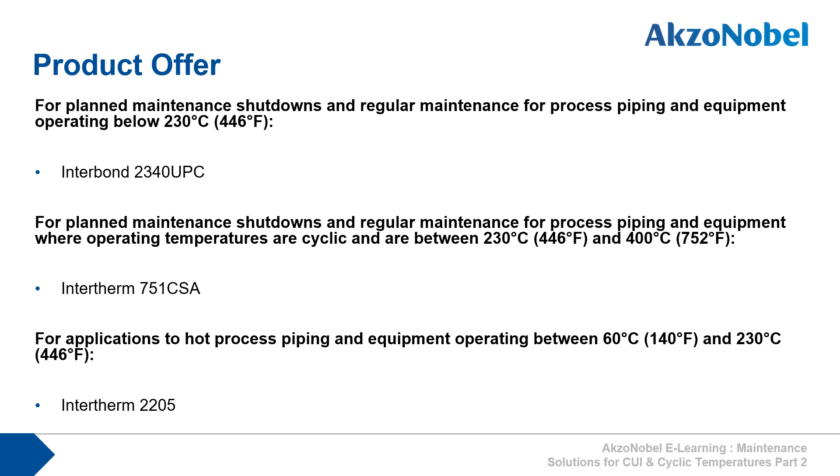Let's recap AkzoNobel's product offer for the CUI and cyclic temperature maintenance market. For planned maintenance shutdowns and regular maintenance for process piping and equipment operating below 230 Celsius, Interbond 2340 UPC should be used. For planned maintenance shutdowns and regular maintenance for process piping and equipment where operating temperatures are cyclic and are between 230 Celsius and 400 Celsius, Intertherm 751 CSA should be used. And for applications to hot process piping and equipment operating between 60 degrees Celsius and 230 degrees Celsius, Intertherm 2205 is the product of choice.

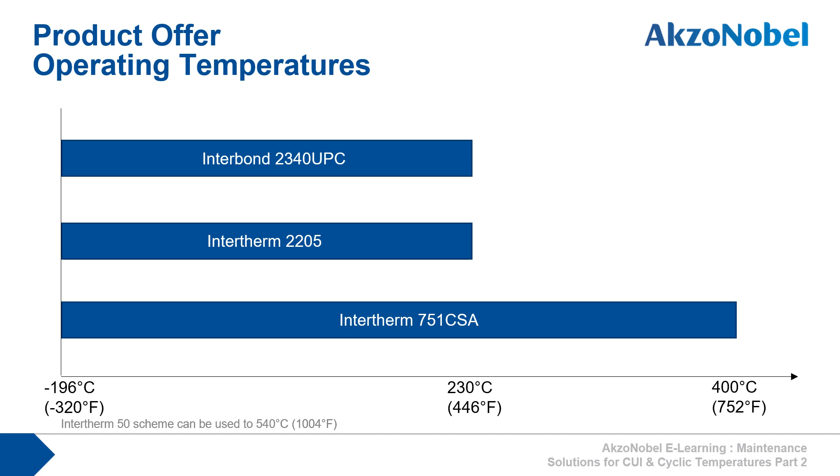This chart shows the operating temperature ranges for the three products. All three products can be used at cryogenic temperatures as well as temperature ranges from ambient to high temperature conditions. But when it comes to direct-to-hand prepared hot steel applications, Intertherm 2205 is by far the best choice, with hot steel applications from 60 to 205 degrees Celsius.

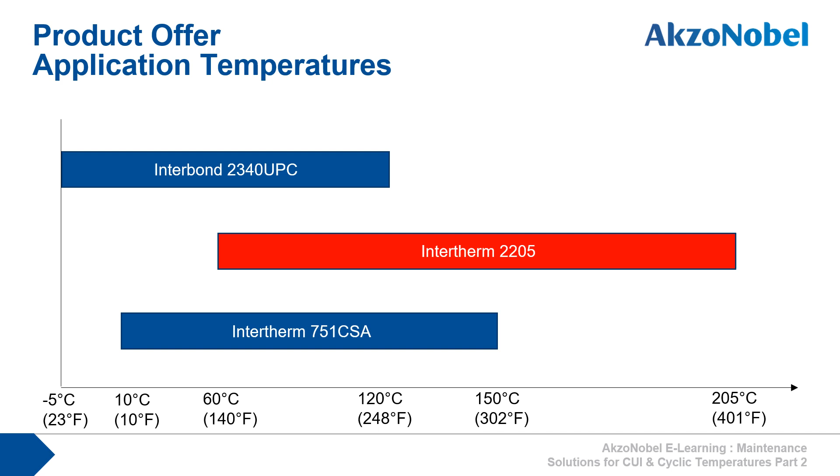The rest of this presentation will now focus on Interbond 2340 UPC and Intertherm 751 CSA. Let's start with Interbond 2340 UPC.

Interbond 2340 UPC, where UPC stands for Universal Pipe Coating, is an alkylated amine epoxy technology, which is a next-generation epoxy phenolic, delivering low temperature cure and higher DFT tolerance compared to traditional epoxy phenolics.

Interbond 2340 UPC is a user-friendly maintenance coating specifically designed for combating CUI that helps generate time and cost savings through fast, low-temperature drying and improved application tolerances.

2340 UPC has fast, low-temperature cure and is dry to overcoat in 14 hours at -5 degrees Celsius. It meets the ISO 12944 Part 9 performance criteria for an ambient cured coating. It has excellent tolerance to over-application, can be applied to hot steel up to 120 degrees Celsius, has high temperature resistance to 230 degrees Celsius, can be used at cryogenic temperatures down to -196 degrees Celsius, and can protect stainless steel against chloride-induced stress corrosion cracking.

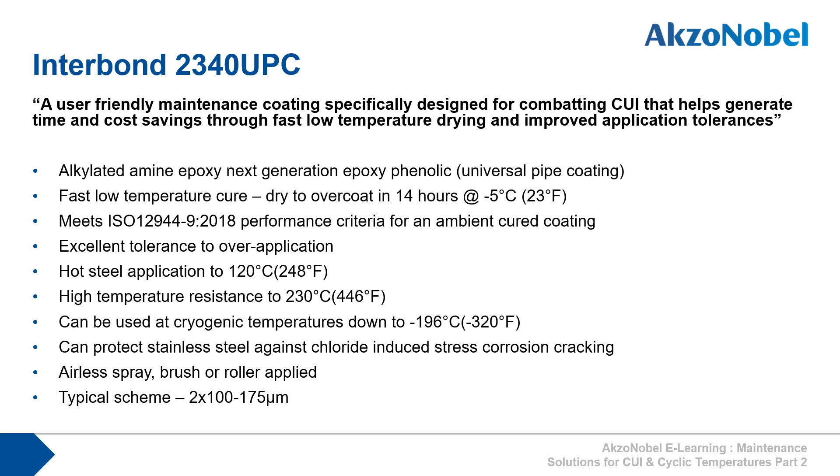Okay, let's look at 2340 UPC's features in more detail, starting with its fast curing property.

Typically, traditional epoxy phenolics will not cure below 10 degrees Celsius. Issues such as maintenance project delays can then happen when temperatures drop overnight or when maintenance needs to be carried out in the winter months.

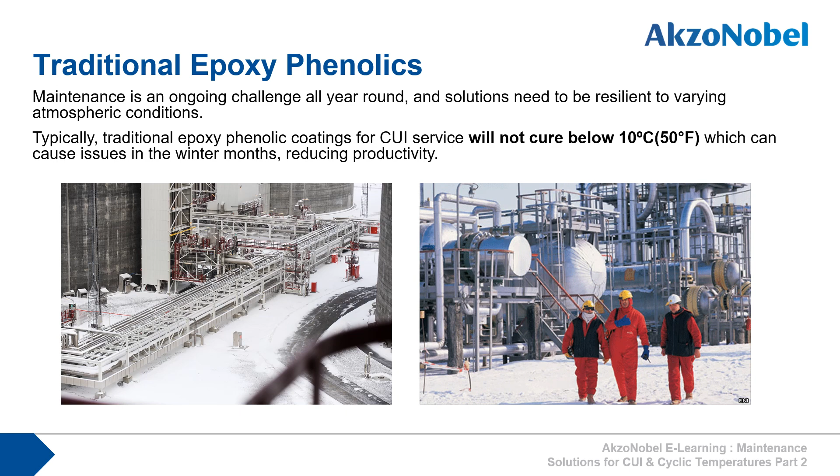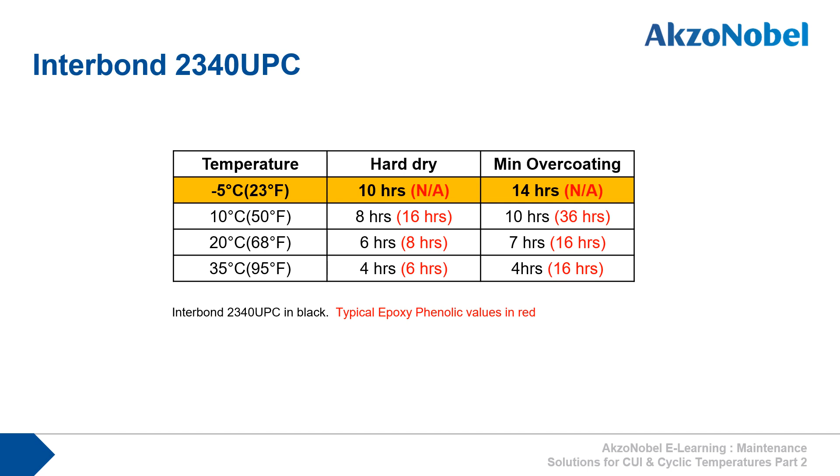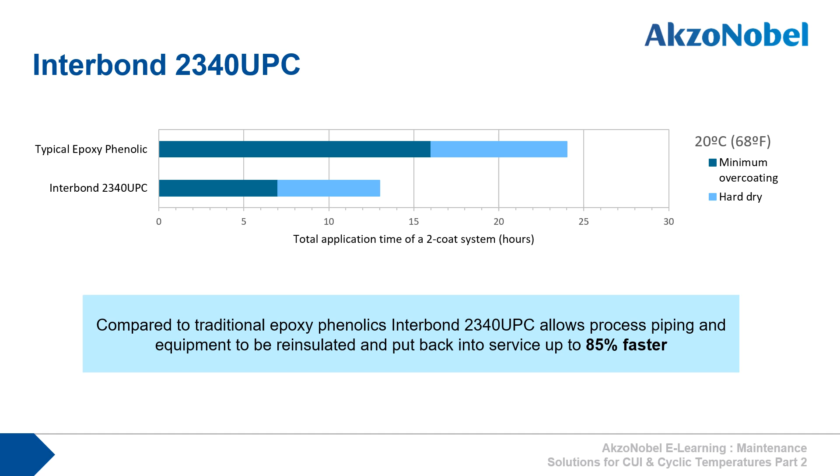Conversely, 2340 UPC can be used down to -5 degrees Celsius, being hard dry in 10 hours at this temperature. As you can see in the table, 2340 UPC has faster hard dry times and has much lower overcoating times than traditional epoxy phenolics. This means that compared to traditional epoxy phenolics, Interbond 2340 UPC allows process piping and equipment to be re-insulated and put back into service up to 85% faster, greatly improving the productivity of maintenance teams.

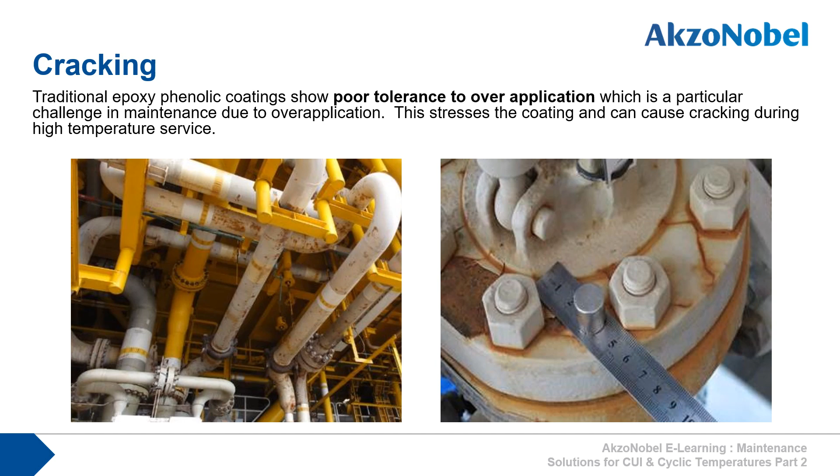Let's now consider over-application tolerance. Again, if we look at traditional epoxy phenolics, we see that they tend to have poor over-application tolerance, and datasheets often state maximum scheme DFTs that must not be exceeded for fear of crack formation. Sometimes cracking is not seen after application and will only show itself once the coated steel is back in operation. If this coated steel is insulated, we will never know what is happening, and so the CUI risk now becomes very high indeed.

As a way to demonstrate 2340 UPC's resistance to cracking due to over-application, a detailed test program was carried out by AkzoNobel. In this program, panels containing a weld are cured at ambient for 7 days and then subjected to 5 heat cycles. One cycle consists of 8 hours at the target temperature, followed by 16 hours cooling to room temperature. Panels are then assessed visually for cracking, blistering, and disbondment and graded. Green, no visible defects. Orange, cracking and defects observed around weld only. And red, cracking and defects observed across the face of the panel.

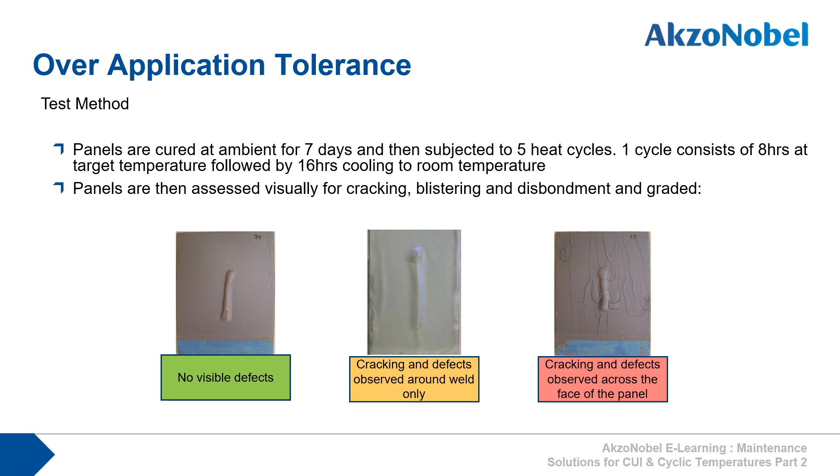Now if we look at a so-called well-formulated epoxy phenolic, heating to 120 degrees Celsius, we see good performance for all schemes.

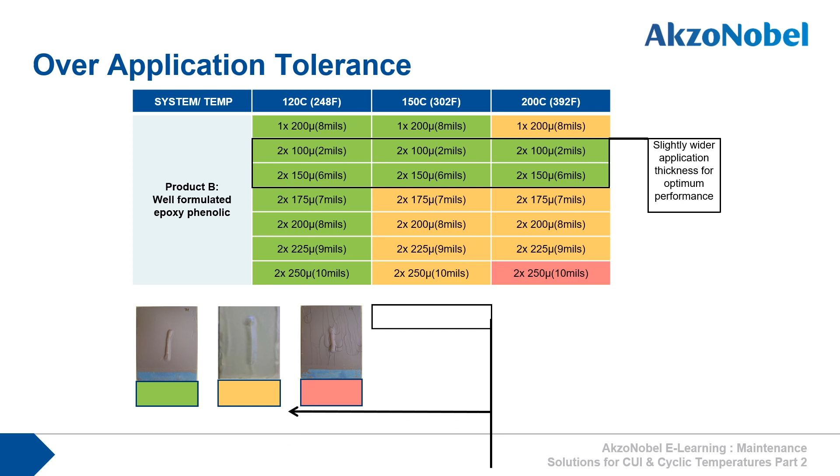This is 2340 UPC's performance in the same tests. Here you can see for all test temperatures and DFTs, there is no cracking whatsoever anywhere on the panels. Interbond 2340 UPC shows excellent tolerance to over-application.

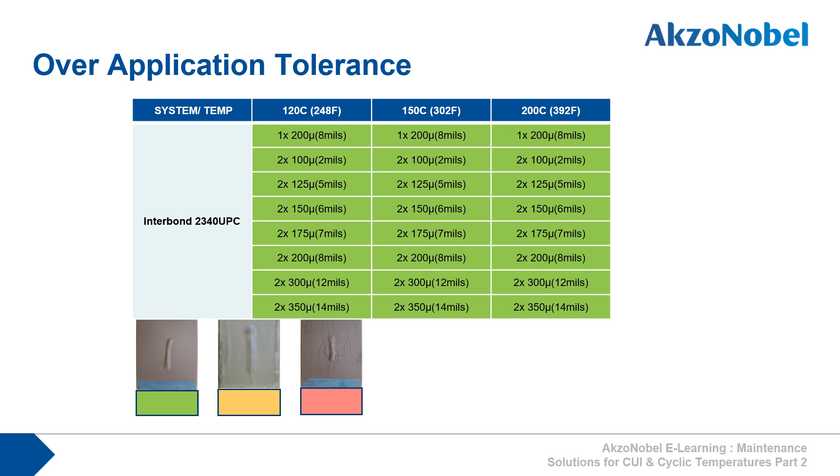Another important consideration when comparing epoxy phenolics is heat resistance. In this study, 2340 UPC was compared against 6 other traditional epoxy phenolics currently in the market. All of them are typically specified for service up to at least 200 degrees Celsius. All schemes were applied at 2 times 125 microns and all cured at 20 degrees Celsius for a minimum of 7 days before testing.

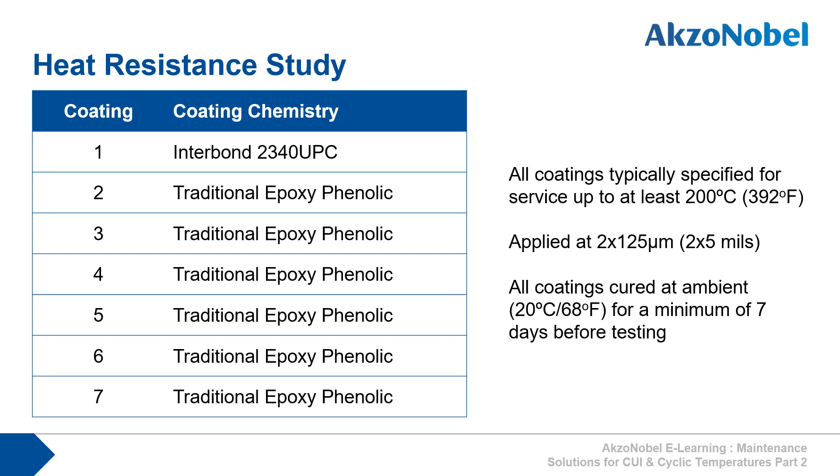After 6 months exposure to 205 degrees Celsius, we see differences in performance. One coating showed significant cracking after just 6 weeks, another significant cracking after 12 weeks, and one some minor cracking after 3 weeks. 2340 UPC and 3 other coatings performed excellently.

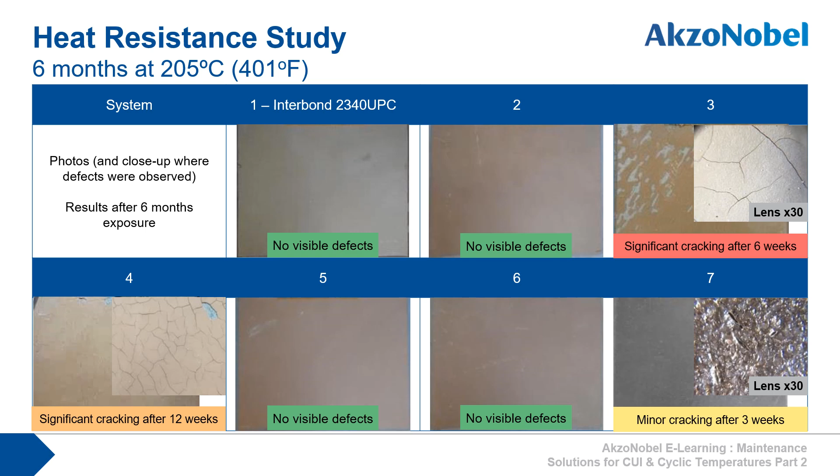Let's now review 2340 UPC's enhanced corrosion protection feature.

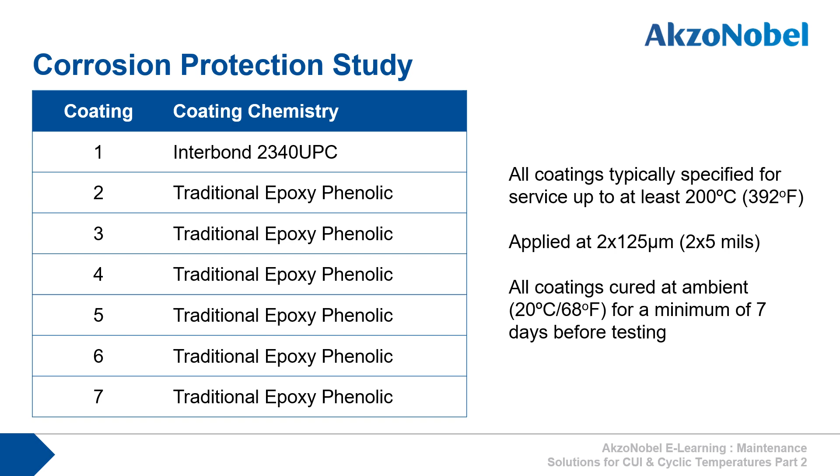In this study, 2340 UPC was compared against the same 6 other traditional epoxy phenolics currently in the market. As before, all schemes were applied at 2 times 125 microns and all cured at 20 degrees Celsius for a minimum of 7 days before testing.

All panels were exposed to 25 cycles of the ISO 12944 Part 9 test standard, as used to qualify coating schemes for offshore CX environments. As you can see, only 2340 UPC performed well in terms of rust creep and no corrosion spots away from the scribe. One coating system showed particularly bad corrosion across the face of the panel. Several coating schemes failed the test with greater than 8 mm corrosion creep, and 2 were close to failing.

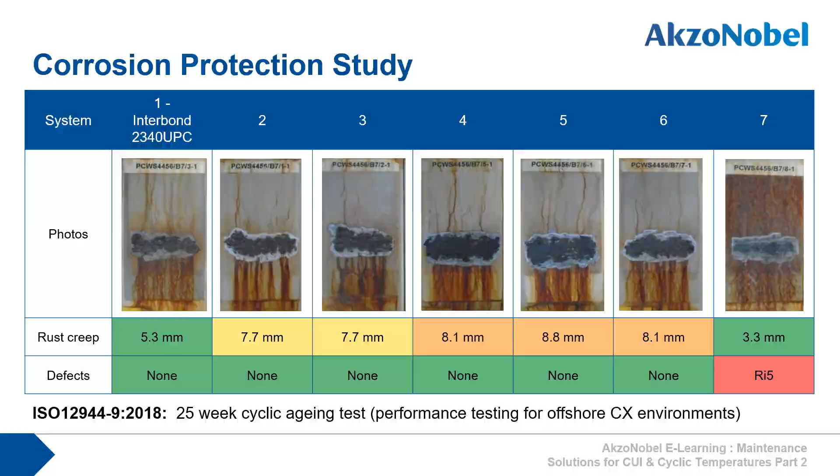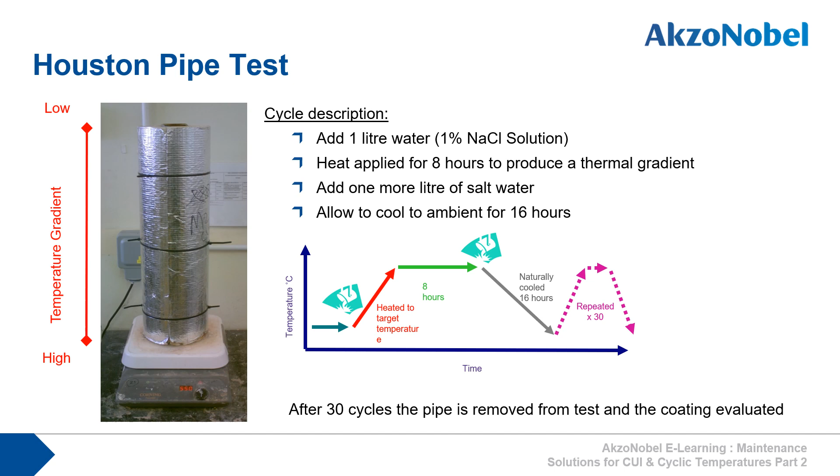Okay, let's now look at corrosion under insulation. You will recall the Houston pipe test from part 1, so I won't go into the detail again.

The test was configured to test the coatings up to approximately 400 degrees Celsius to clearly show the point of failure. Here you can see the results from the 2 pipe tests. On the right is a traditional epoxy phenolic, and on the left 2340 UPC. The results show that both products show very good performance up to around 240 degrees Celsius and so are suitable for CUI protection. 2340 UPC has a slightly higher temperature tolerance, which is particularly useful for temperature spikes experienced during steam outs.

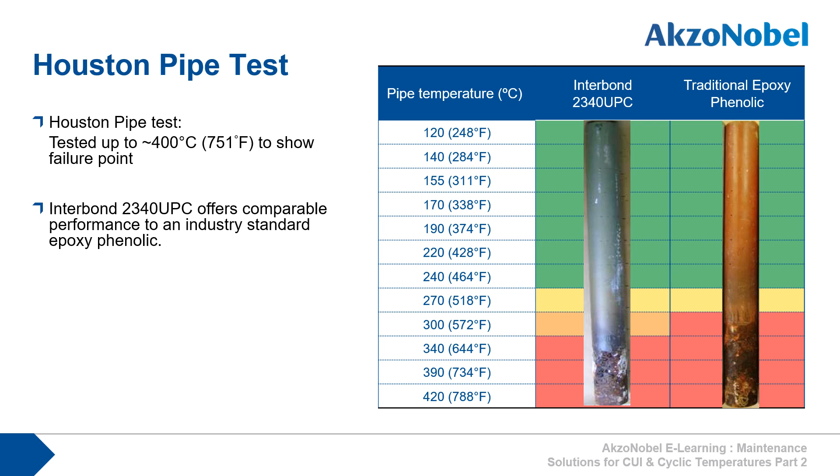So to summarize, traditional epoxy phenolic solutions do not cure below 0 degrees Celsius, and in most cases not below 10 degrees Celsius. Traditional solutions are sensitive to over-application and can crack in service, leading to performance and cost issues later on.

Interbond 2340 UPC is fast curing, meaning it can be re-insulated up to 85% faster than traditional epoxy phenolics at 20 degrees Celsius. It can be applied down to -5 degrees Celsius, extending the maintenance window, has up to double the DFT over-application tolerance of other epoxy phenolics, has excellent corrosion resistance, allowing a single scheme to be used from -196 degrees Celsius to 230 degrees Celsius, and so reducing system complexity, and can be applied to hot steel up to 120 degrees Celsius.

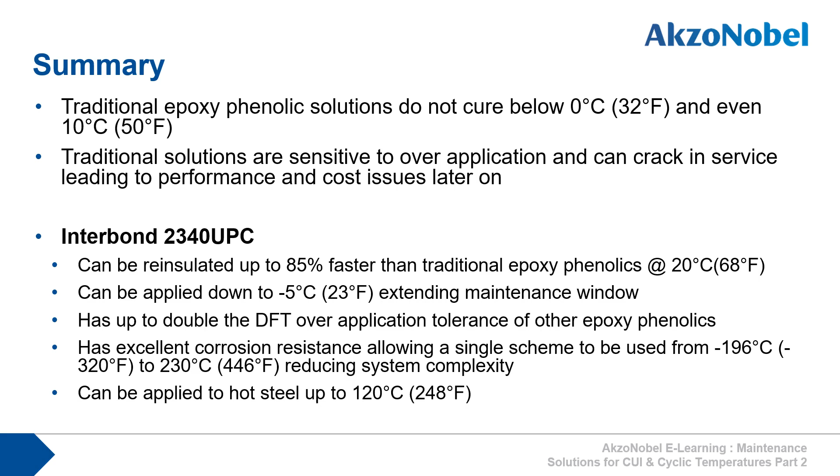Let's now turn to Intertherm 751 CSA. Intertherm 751 CSA is a heat-resistant cold spray aluminium, an inorganic copolymer technology providing corrosion protection to steel in both atmospheric service and under insulation operating in thermal cyclical conditions.

Intertherm 751 CSA is a user-friendly maintenance coating specifically designed for combating CUI in cyclic temperature conditions in the cryogenic to 400 degrees Celsius temperature range.

Intertherm 751 CSA is a titanium-modified inorganic copolymer, cold spray aluminium, provides excellent CUI protection to carbon steel undergoing temperature cycling, has a proven track record dating back to 2005, has excellent resistance to thermal shock, can be used on SA2.5, SP11, SP3, ST2, UHP, WJ surface pretreatments, can be used to repair TSA field joints, can be applied on hot steel to 150 degrees Celsius.

Can be used at cryogenic temperatures down to -196 degrees Celsius, can protect stainless steel against chloride-induced stress corrosion cracking, can be airless spray, air spray, brush or roller applied, and can be applied at either 1 times 175 to 200 microns or 2 times 100 micron schemes.

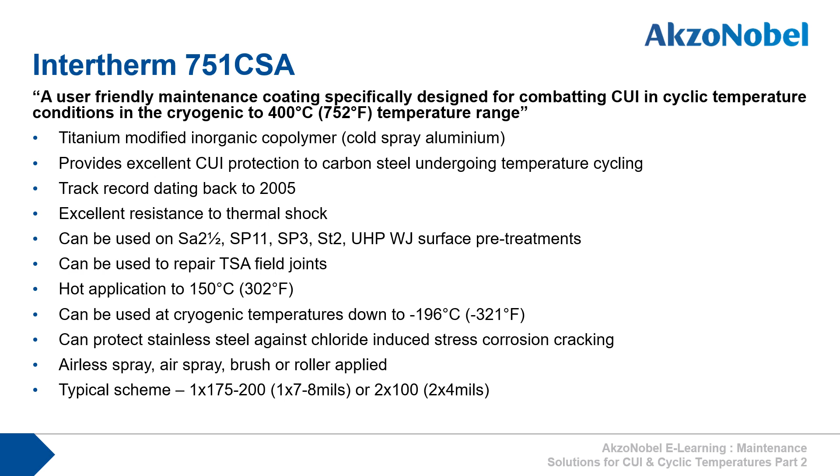Let's now look at 751 CSA's key feature, temperature resistance. A key reason for determining the temperature resistance of generic coatings is bond strength.

The best organic high heat coatings based on epoxy amine chemistry typically break down at temperatures above 230 degrees Celsius, whereas inorganic coatings have temperature resistance well in excess of 230 C, where some ceramic coatings can have a temperature resistance approaching 1000 degrees Celsius.

751 CSA is an inorganic coating that uses silicon-oxygen bonding to form its coating network. Silicon-oxygen bonds are much stronger than carbon-carbon bonds, and so 751 CSA has excellent temperature resistance up to 400 degrees Celsius.

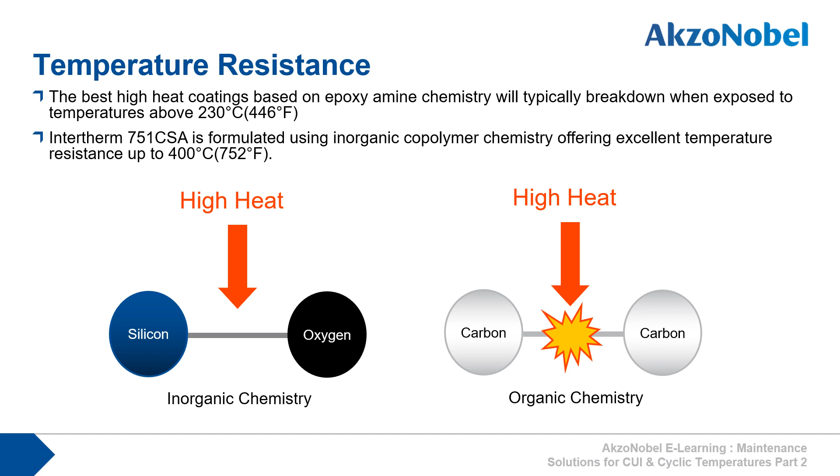A word about more traditional solutions. Inorganic zinc silicates are indeed temperature resistant to 400 degrees Celsius, but they are not suitable under insulation as per the NACE SP0198 standard, and they are difficult to apply, requiring adequate temperature and humidity to fully cure.

Aluminium silicones are temperature resistant to 540 degrees Celsius, but don't provide corrosion resistance under insulation, particularly in the CUI zone, and tend to fail under cyclic conditions. They also need to be applied in multiple coats of 25 microns each, which is time-consuming for applicators.

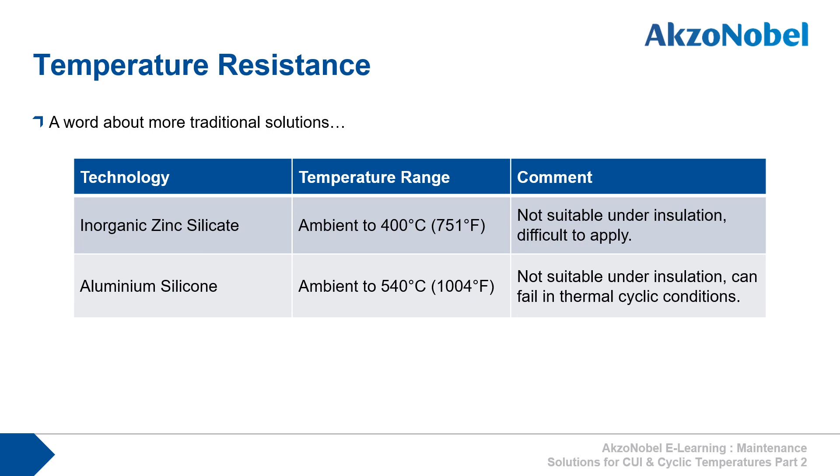Cyclic temperatures can give rise to different environments. In thermal cyclic operating conditions, for corrosion to occur, three key elements must be present: steel, water, and oxygen. Even without water, metals are still subject to corrosion, so-called dry thermal scaling. And then there is rapid cooling, which leads to condensation and subsequent corrosion problems during the operation cycle and shutdown.

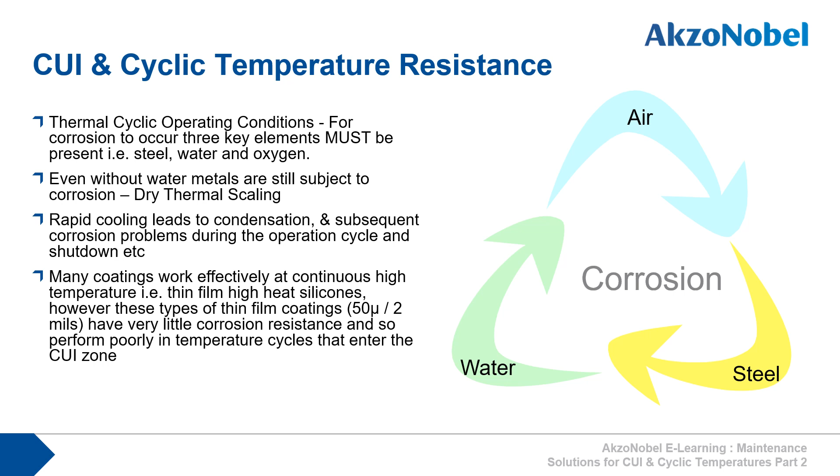Many coatings work effectively at continuous high temperature, i.e. thin film high heat silicones. However, these types of thin film coatings, 50 microns, have very little corrosion resistance and so perform poorly in temperature cycles that enter the CUI zone.

Intertherm 751 CSA has been specifically formulated to withstand the extreme effects of temperature cycling. Extensive track record and laboratory performance testing has demonstrated its ability to withstand elevated temperature exposure while still providing long-term corrosion protection. Particular applications where temperature cycling is prevalent are heat exchangers, stacks, and gas dryers.

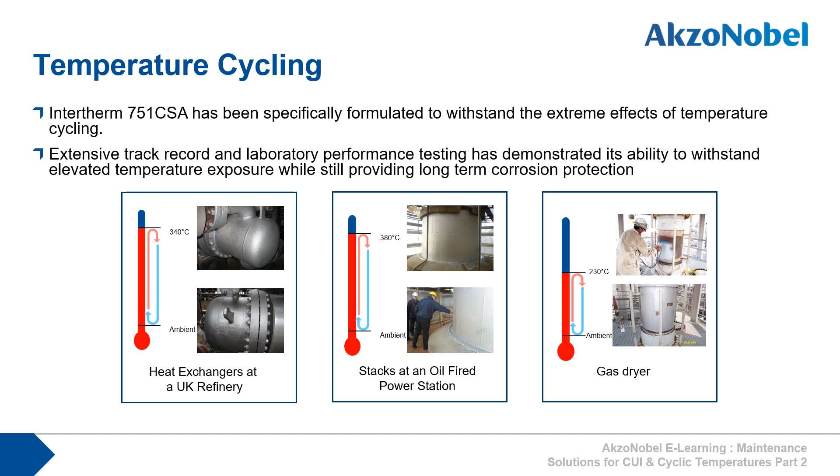751 CSA was born from the extensive screening testing carried out using the CUI cyclic corrosion pipe test, now known as the Houston pipe test. It is also now an optional extra test in the ISO 19277 test standard. The test simulates aggressive temperature cycles by using a series of heating and cooling steps.

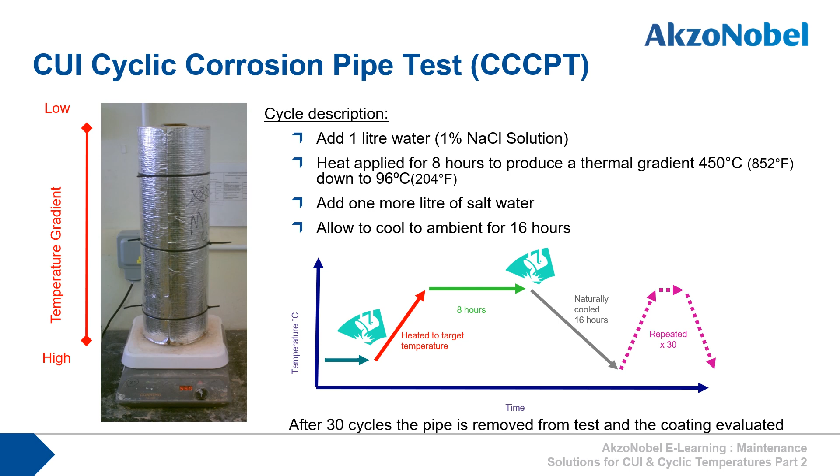And to make the test even more aggressive, calcium silicate insulation was selected to maintain a high level of water saturation around the test pipe.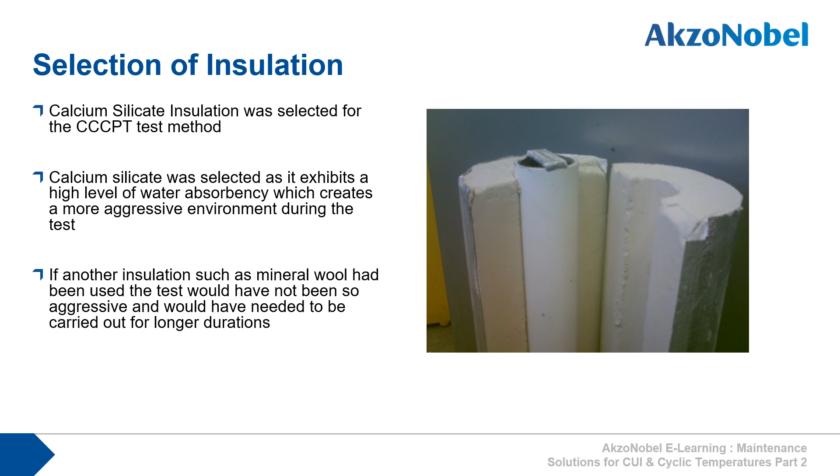Over 300 pipes have been put through the test, and here you can see how it easily differentiates between generic coating technologies. The epoxy phenolic is starting to degrade around 230 degrees Celsius, and the epoxy around 120 to 150 degrees Celsius. The zinc silicate shows corrosion along the length of the pipe, whereas 751 CSA shows very good performance across the temperature range. Note the left end of the pipe is the end in contact with the hot plate and is breaking down because it cannot be protected properly, so it is discarded when carrying out coating performance assessments.

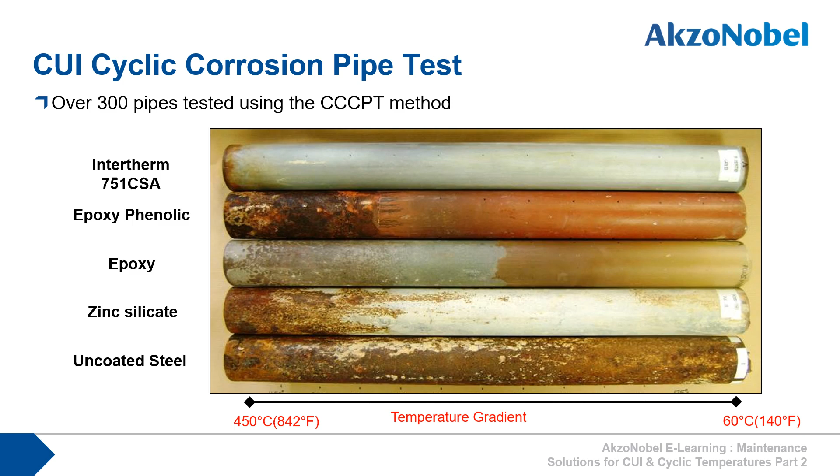751 CSA was benchmarked in the Houston pipe test against two other products, A and B. Both are available on the market and both claim high temperature resistance to 650 degrees Celsius. Both are MIO containing coatings. Let's take a more detailed look at performance.

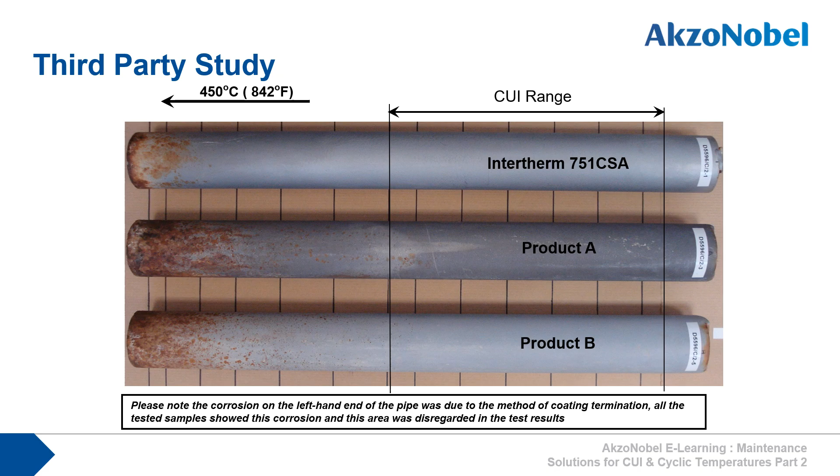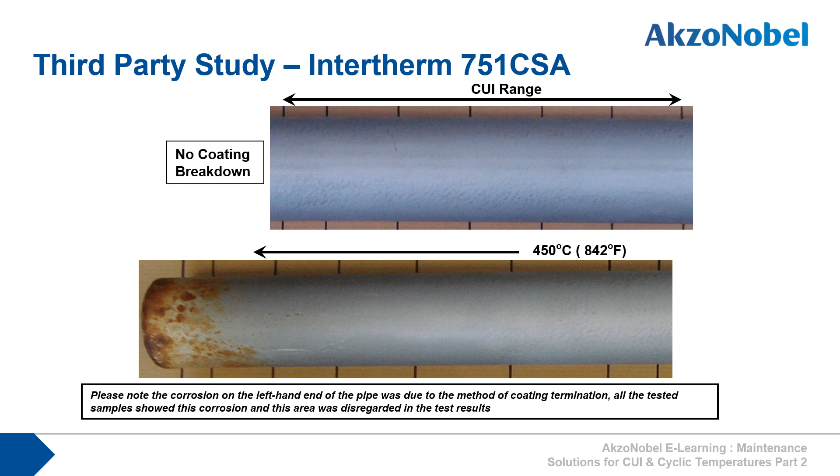In the CUI temperature range, 751 CSA showed no coating breakdown, and there was also no coating breakdown up to 450 degrees Celsius. Here is a closer look at the coating surface at 235 degrees Celsius and in the range 275 to 300 degrees Celsius. Both photos show no evidence of coating breakdown.

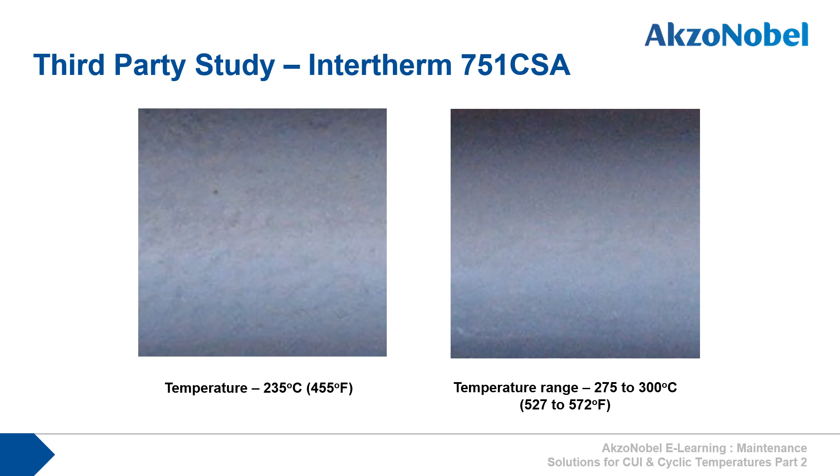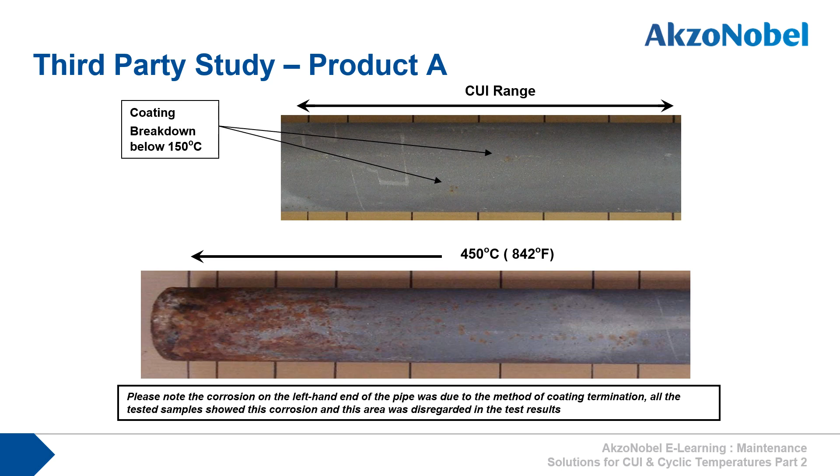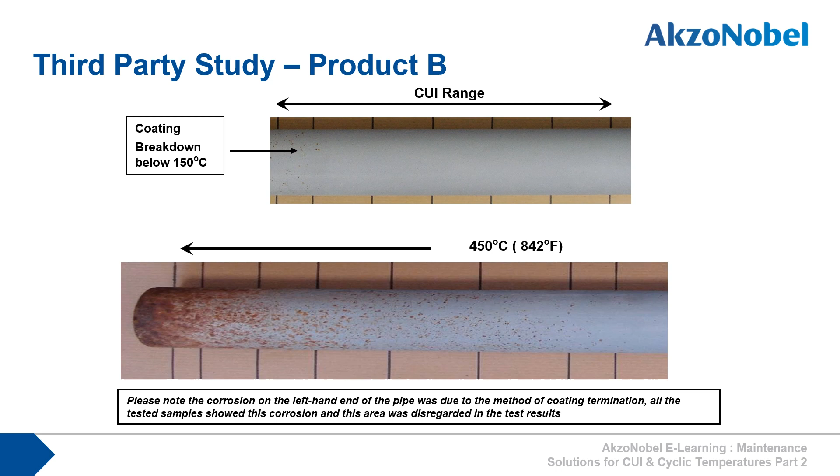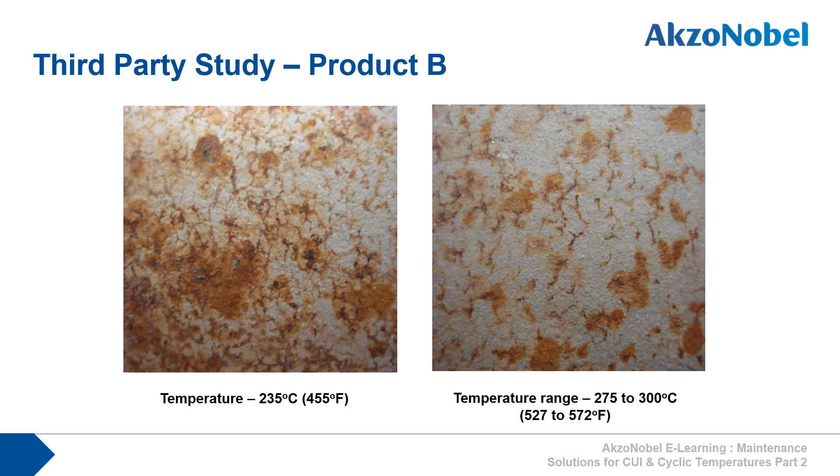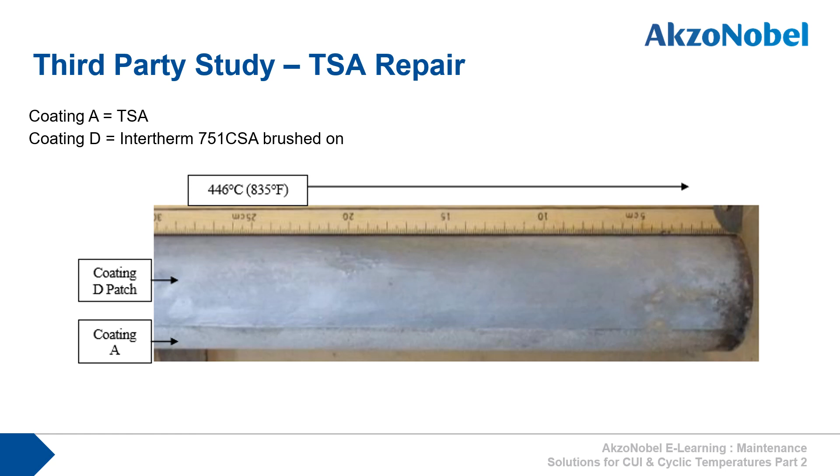751 CSA can also be used for TSA repairs. In this study, a TSA coated pipe was repaired with a brushed-on patch of 751 CSA. The pipe was then put through the Houston pipe test. In these photos, you can see that there was no evidence of coating breakdown, demonstrating 751 CSA's ability to repair damaged TSA.

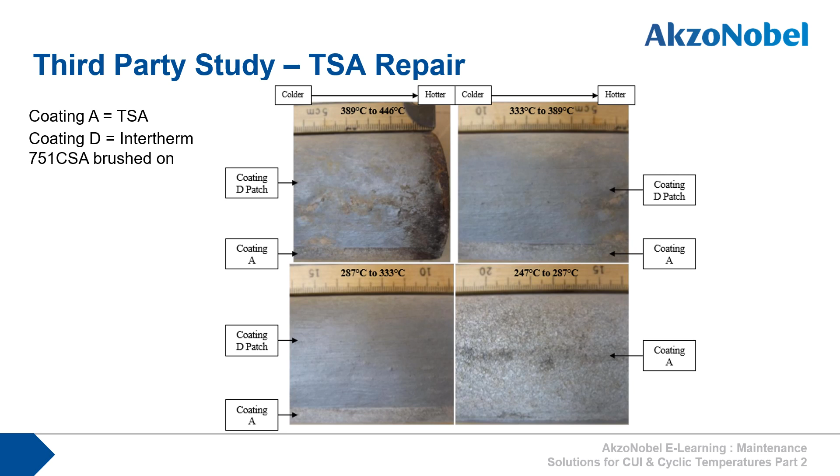And here is a test showing 751 CSA's use as a field joint coating on TSA coated pipes. The field joint was prepared to SP11 with a power tool such as an MBX bristle blaster, and then the 751 CSA was brush applied. After two 8-hour cycles at 400 degrees Celsius, there was no cracking or blistering of 751 CSA observed.

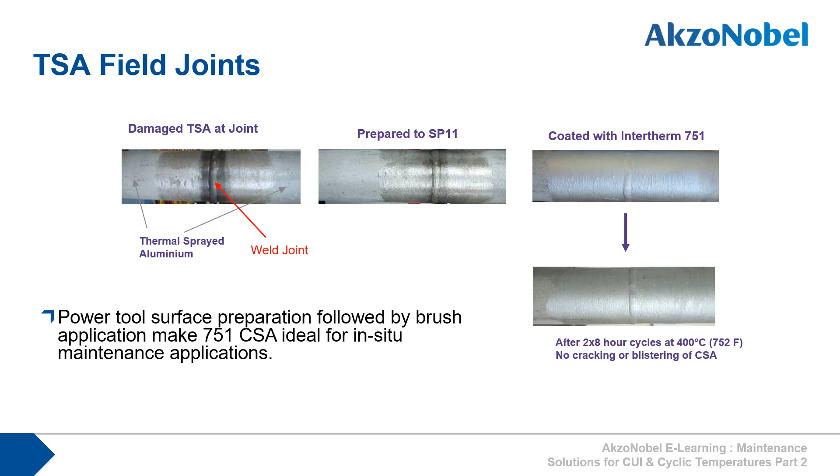So to summarize, traditional solutions such as inorganic zincs and modified silicones do not perform well at both high temperatures and in the CUI temperature range. MIO-filled high heat coatings have been shown not to perform well in aggressive cyclic testing.

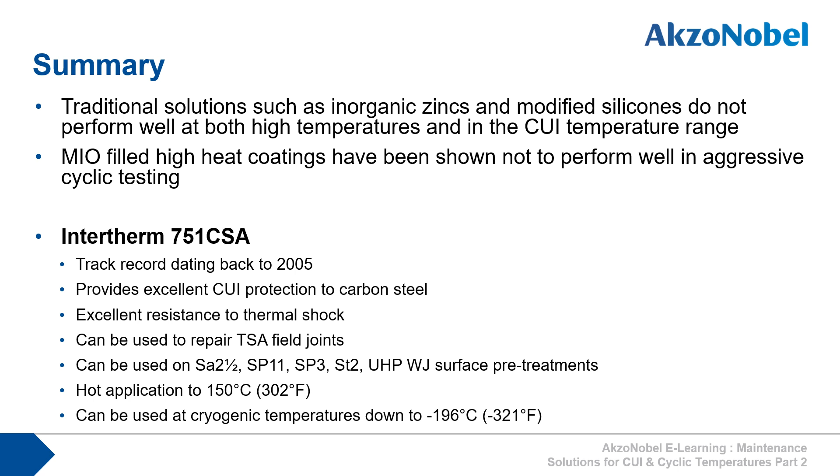Intertherm 751 CSA has a track record dating back to 2005, provides excellent CUI protection to carbon steel, has excellent resistance to thermal shock, can be used to repair TSA field joints, can be used on SA2.5, SP11, SP3, ST2, UHPWJ surface pretreatments, can be applied to hot steel up to 150 degrees Celsius, and can be used at cryogenic temperatures down to -196 degrees Celsius.

And to re-summarize the product range again, for planned maintenance shutdowns and regular maintenance for process piping and equipment operating below 230 degrees Celsius, Interbond 2340 UPC should be used. For planned maintenance shutdowns and regular maintenance for process piping and equipment where operating temperatures are cyclic and are between 230 degrees Celsius and 400 degrees Celsius, Intertherm 751 CSA should be used.

And for applications to hot process piping and equipment operating between 60 degrees Celsius and 230 degrees Celsius, Intertherm 2205 is the product of choice.